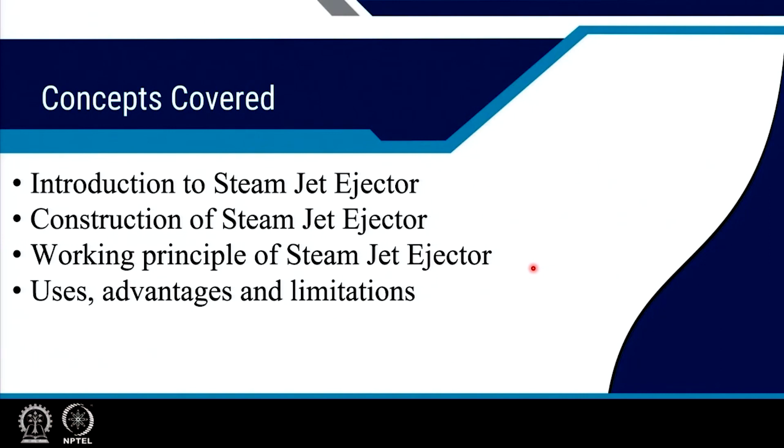As the name suggests, a steam jet ejector is formed out of a jet utilizing steam. So, wherever in an industry you have waste steam available, this is the ideal pump, because that waste steam can be used to produce vacuum. You do not require any extra electrical energy to run the vacuum pump. And steam is also basically water vapor at high temperature. So, you can again condense it using suitable condensers and recirculate it or utilize it after some treatment, etc. So, it is a friendly technology.

Since we are dealing with high pressure steam, the regular precautions that we take with high pressures and steam handling, which we regularly do in power plants and all. Even in train technology, steam handling has become very popular and it is well established technology, and controlling steam flow rate and associated dangers, handling the steam equipment, steam chest, high pressure, these are all

well established. So, it is a typical well established technology, being used particularly in an industry when there is waste steam availability to produce the vacuum requirements of that particular application. That application can be a drying application, or a distillation application in pharmaceutical or chemical industries. It can be a steel degassing application or paper drying applications.

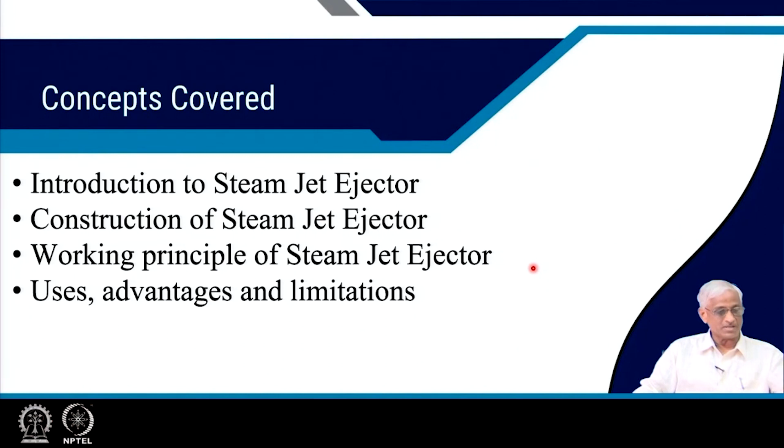These are taken from a very good book. I suggest all chemical and pharmaceutical sectors read this book, Vacuum Technology in Chemical Industry by Wolfgang Jorisch. There are good books in vacuum technology like Roth and Hablanian and others. Of course, I have also written a book on vacuum science and technology from Allied Publishers.

But these are very specialized books where chemical and pharmaceutical applications are highlighted, and that is where steam jet ejectors, water ring pumps with boosters, and nowadays dry pumps like screw pumps and claw pumps are covered. I am just giving you some picture of an industrial scenario, but we will focus today only on the steam jet ejector and its working principles.

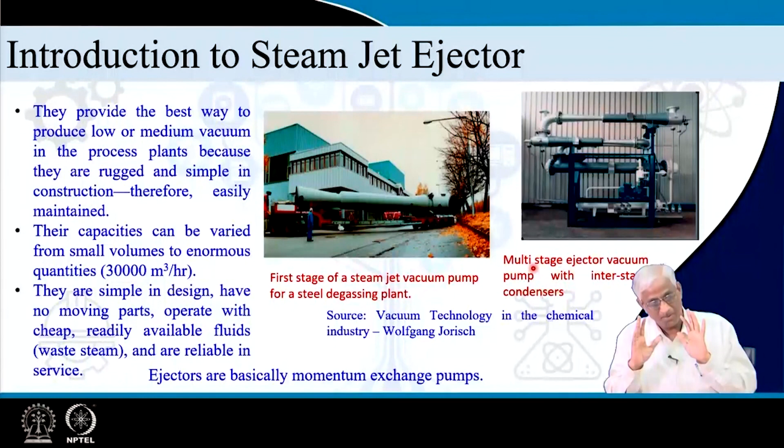Basically, they are positive displacement, but using a momentum exchange pump. In a way, this positive displacement word is a very peculiar word. It displaces, but actually it lifts the gas, mixes and sucks it, and takes it out. In a way, they are displaced. It is not a typical displacement where a rotor is moving, a volume of gas is taken and exhausted.

In jet pumps, they are carrying loads along with them, but later they are leaving them and this steam is again condensed back. In a way, the load is displaced. There are very good animations available on the net, and a lot of manufacturers are manufacturing a variety of steam jet ejectors of various capacities. And the control systems, valves, pressure, temperature, all these are well established now, and you can control them remotely in industrial atmosphere.

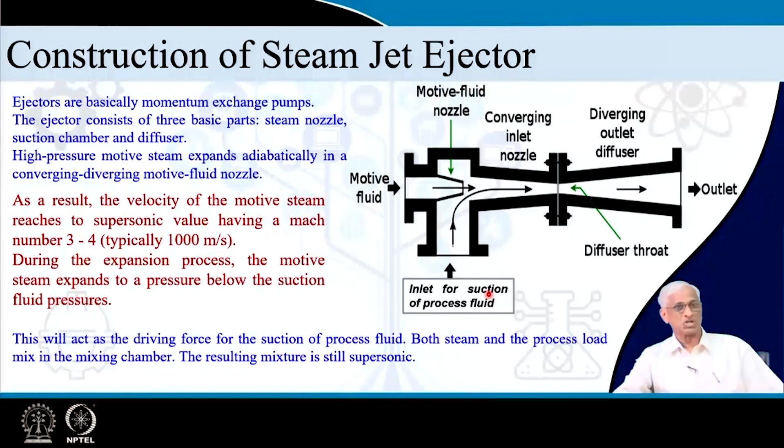Whatever you wanted to remove in a process chamber, whether it is a tomato juice or sauce or process applications like chemical or food processing, etc., all the vapors will come here. They will be mixed up, they will not have supersonic velocity. This supersonic steam will get mixed up here, momentum will be transferred, and that way the velocity will further come down, but anyway reducing area also facilitates that, and finally it comes to the throat area.

Then onwards, since it has come to sonic speed, increasing area will also create further velocity decrease, and the pressure head picks up. At the outlet it gets exhausted if it is single stage, otherwise it is connected with an intercooler to condense the steam back, which is a working fluid, and the load gases from the process will be conveyed to the next stage if it is a multi-stage. So, in the construction itself we could understand the operating principle, because there is nothing much moving here. The action and construction go hand in hand.

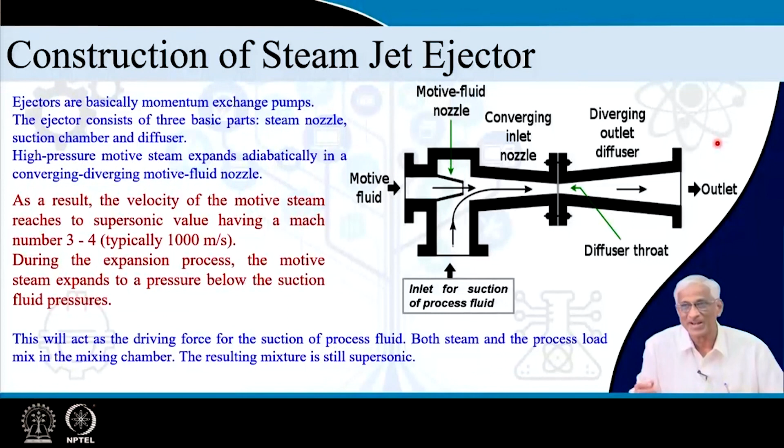Okay. So, from high pressure the pressure suddenly comes down, and velocity picks up like anything. In the diffuser portion it starts coming down, pressure picks up, these are corresponding lines in the assembly, and when the suction fluid from this port gets mixed up with this supersonic steam, both of them together will further slow down till it comes to the throat portion.

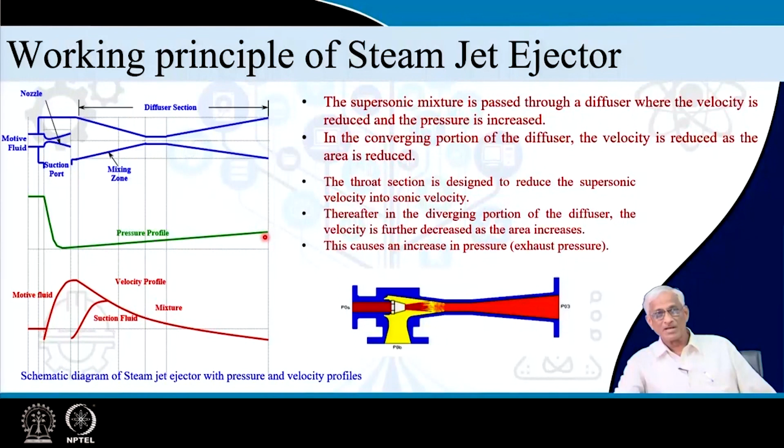Once it crosses the sonic speed, increasing area will create further reduction in the velocity of the combined mixture, and during that time the pressure head further picks up, and this can be connected to another stage with an intercooler, or it can be exhausted. So, see, one stage will create 50 torr, 2 stages create 5 torr, 3 stages will create 2 torr, 4 stages 0.2 torr, 5 stages and 6 stages even lower.

Typical materials that we use for steam jet ejectors are stainless steel, bronze, gunmetal, cast iron, etc. for the various nozzles, because they have to withstand high temperatures, jerk, high pressure, etc. Non-metals like porcelain and graphite are also frequently used in highly corrosive applications. But we have to be careful in handling these things, we have to maintain the pressure at the steam chest, and we have to see that velocities are properly matching within the design length of the diffuser, so that they reach sonic speed at the throat portion for a particular load.

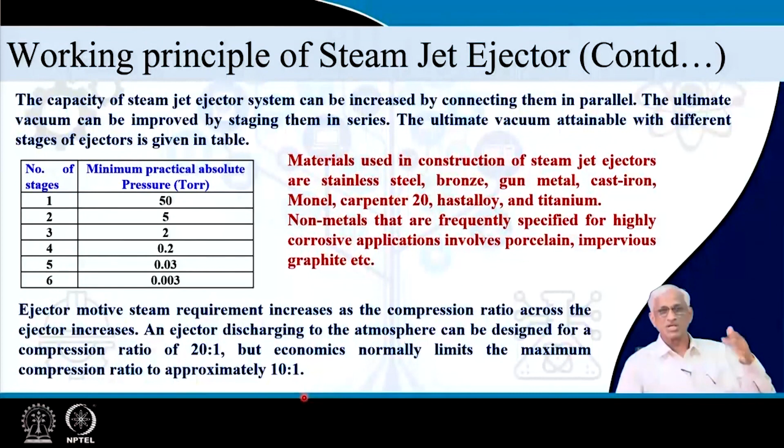If the load is different, then you will have to adjust the flow rate of the steam. So, there are a lot of valve controllers, but there is no physical motion of any piston or anything here. Okay. So, there are pluses and minuses of both, but nowadays very high quality process controllers are available to control the flow rates. Typically an ejector discharging to atmosphere can be designed for a compression ratio of 20:1, but most of the time economics limits it to 10:1. Single stage ejectors are not that popular; 2 stage and 3 stage ejectors are more popular. How do they look?

So, that way the remaining portion which is not condensed will go to the next stage, and again it goes to the intercondenser, third stage, fourth stage, like this. Several stages together can produce a good amount of vacuum. So, depending on the vacuum level, flow rate level, purity level, etc., or mass flow requirements of your process fluids, you will have to design different varieties of steam jets. If you want to eliminate too many steam jet ejectors, you can connect a water ring pump as a backing of the steam jet ejector.

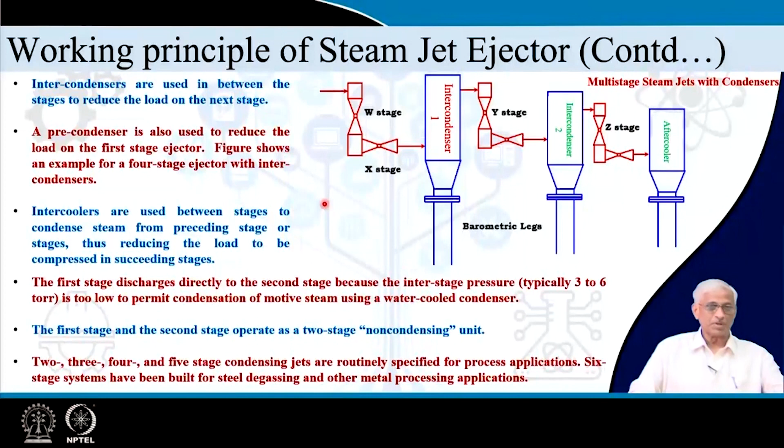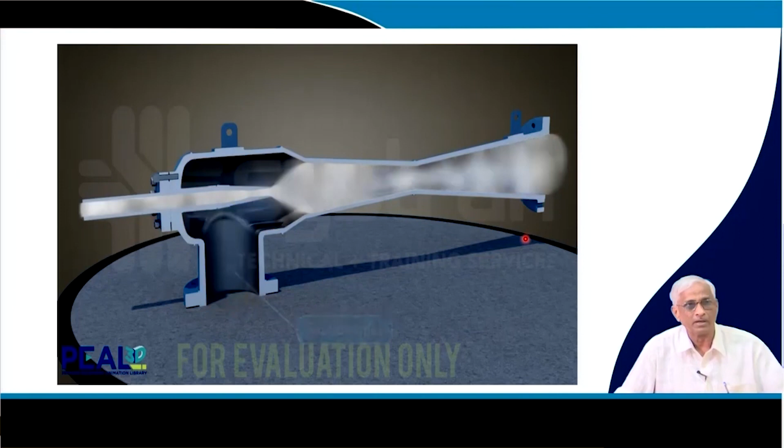And you can look at a little bit of animation, the steam that is coming and suction fluid is catching immediately. So, this type of animations are available in literature. You can see varieties of animations, and principles are very well explained. You can use CFD also for modeling these things.

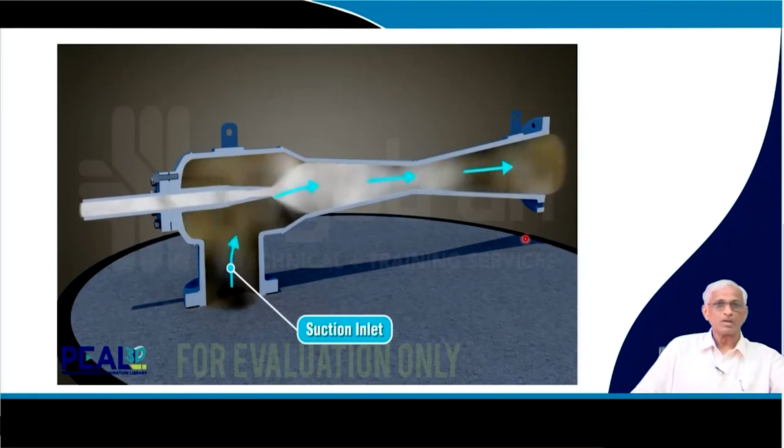Okay. So, what are the uses, advantages and limitations? I already told you, so I will be repeating towards the end. This is the last slide. These are process industries involving exhausting fumes, exhausting air from condensers, vacuum evaporation of very large scale, distillations, crystallizations, refrigerations. There is even jet refrigeration nowadays, steam jet refrigerations. Once upon a time they were not attractive because other refrigerators are very popular, but now with lots of environmental things, we are again going into steam jet type of refrigerators, particularly for large scale refrigeration. Though you have to spend energy to create steam, etc., you have to take care of that.

Advantages are low investment costs compared to other pumps, and no water gas separator is required to be installed. No seal water cooler is required, that sealing fluid type of things are not there. Only we require intercoolers to condense the steam, etc., and no moving parts. So, maintenance is very low, very compact construction, and it is quite friendly to a normal mechanic. And corrosion erosion resistant, because ejectors can be constructed from various materials which are not that costly, and a very high suction load at a reasonable vacuum. So, you can use it for filtration, drying, air conditioning and pumping of very large volumes of vapor.

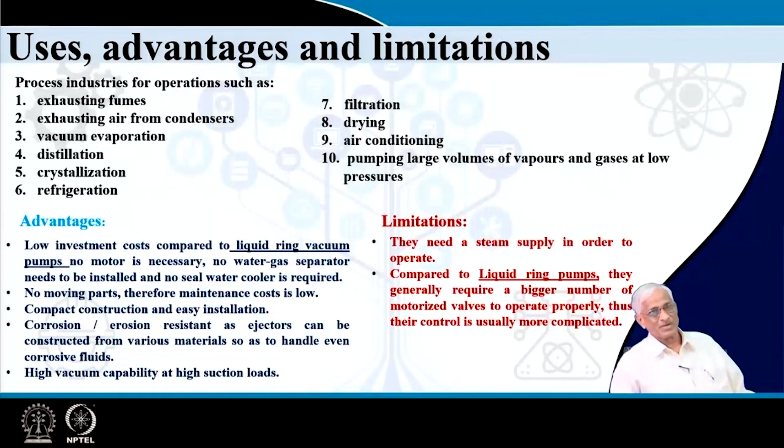Of course, there are certain limitations. They need steam supply, and if there is waste steam, definitely you should go for these things. Compared to liquid ring pumps, they generally require a bigger number of motorized valves for flow rate controls, etc., to operate properly. So, control is usually more complicated. So, when to use steam jet ejectors, when to use water ring pumps, when to use boosted water ring pumps, when to use backing of this water ring pump to the steam jet ejector, all that you have to decide depending on the vacuum level and the flow rate level.

So, we have seen steam jet ejectors and water ring pumps now. Later we will go to their competitors, recently coming in the last 20-30 years. They are in the same level of pressures, levels of vacuum, same flow rates, not very high flow rates, in the middle flow rates. They are comparable to these two pumps. They are called dry pumps, like claw pump and screw pump. We will see in the next few classes.